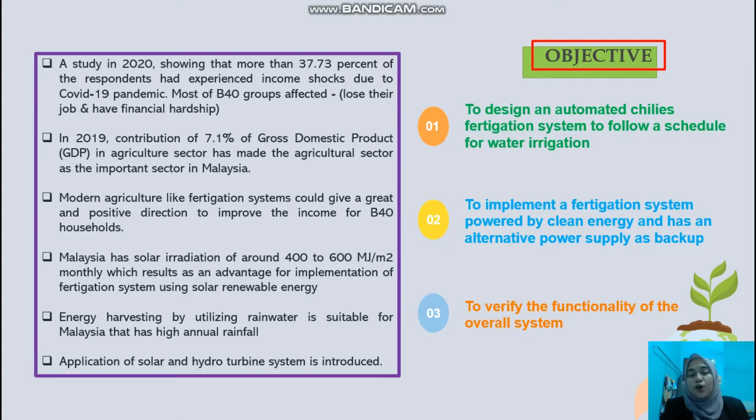So this is the flowchart of how the automated fertigation system runs. I will explain the hydro turbine part first. Basically, in this project we use two water tanks that collect rainwater and flow into the pipeline with high velocity to move the turbine. The turbine transforms the potential energy and flow into kinetic energy and converts it into electricity.

The solar panel collects energy from the sun and converts it into electric power. Both renewable energy sources, the hydro turbine and solar panel, are connected to the charge controller and then to the battery bank. The battery bank is connected to the inverter and timer, and this is the fertilizer timer.

The fertilizer timer is connected to the water tank, and then we move to the operation part. If the water pump is on, it will open and start watering the plants. If the switch does not open, it means no watering of plants that day.

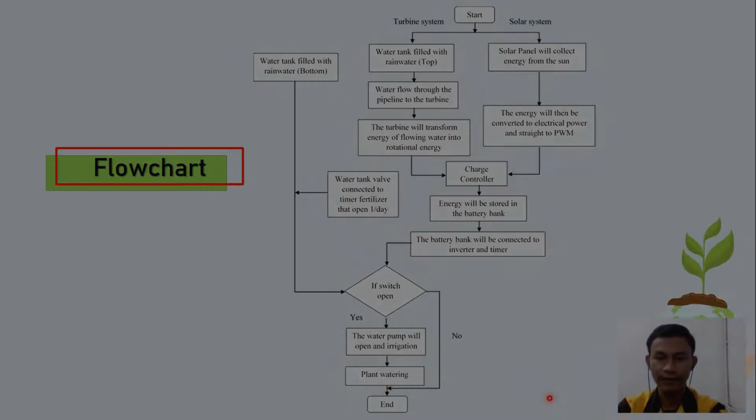Today I will be presenting the design of the automated fertigation system with hybrid solar and turbine power. As you can see here, there are two power sources generating power for the system, which are solar and hydro turbine. Starting from the hydro turbine, it generates electricity through the turbine controller to give an appropriate value to charge the battery.

Same goes for the solar panels. They generate electricity to charge the battery through the solar charge controller. We are using 12 VDC output power for the hydro turbine and 400 watts for solar. The battery capacity is 150 Ah with 12.8 volts to store the energy.

We are using the inverter that converts the electricity from DC to AC, following the AC load requirement. The size of the inverter is 400 watt. The function of the timer is to arrange a schedule in irrigating the plant. The timer will cut and turn on the power supply to the water pump, following the user setting. We are using 373 watt, which is half horsepower, for the water pump to irrigate the plant.

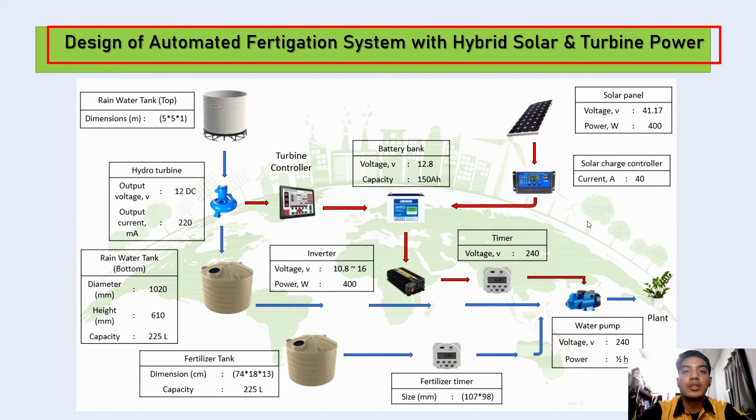There are 3 water tanks. The first one is a rain collector, and the second one is the rain water tank used to store the water from the water turbine for irrigating the plant. The fertilizer tank is used to store the mixed fertilizer in a liquid form. The fertilizer timer will schedule the irrigation to ensure that the plant will get sufficient nutrients.

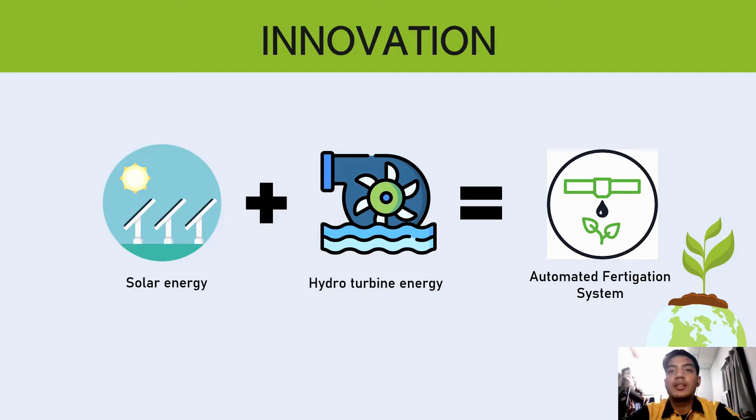For the innovation, we are selecting two renewable or clean energy sources, which are solar energy and hydro turbine energy, in giving electricity to the automated fertigation system. And I'm going to present the result of MATLAB simulation. So the first one is the relationship between the irradiance, temperature, and the output of solar panel.

Irradiance is manipulated from 1000 to below 400 over time, and the temperature is manipulated from around 25 degrees Celsius to 50 degrees Celsius and falls back to 20 degrees Celsius. So we can notice that the output current of solar panel remains constant, while the output voltage decreases when the irradiance decreases, and the voltage increases when the irradiance increases. The voltage drops when the temperature increases, and the voltage rises when the temperature drops to 20 degrees Celsius.

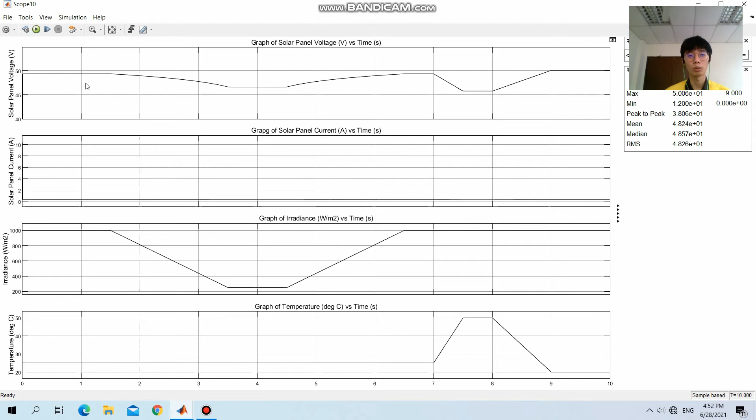We can conclude that the power of the solar panel is equal to voltage multiplied by current. So when voltage is increased, the power is increased. Power output of solar panel is directly proportional to the voltage of the solar panel. The second result shows the measurement of the battery. The battery is unloaded, with the load disconnected, and the battery will be charged by our solar panel and hydro turbine.

During the charging stage, the state of charge of the battery increases over time, and the voltage of the battery increases over time. The current of the battery increases in negative magnitude, which is below zero. This indicates that this is a charging state. The current flows into the battery, so the current is in negative magnitude.

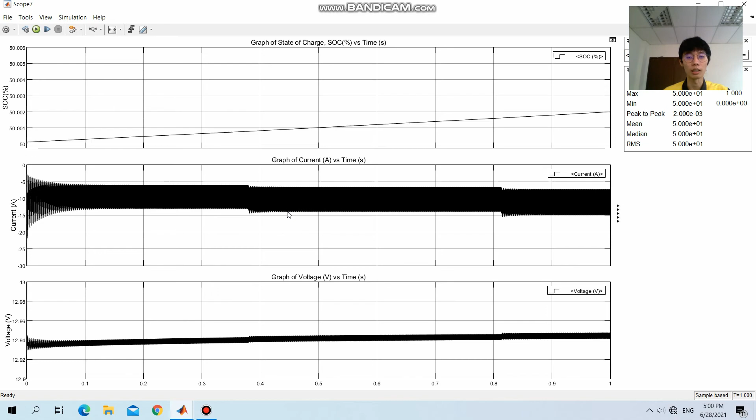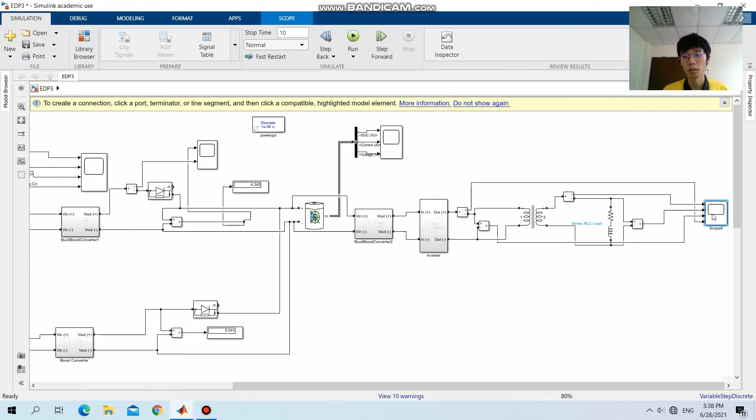As the conclusion from our project, solar and hydro turbine are able to generate power supply to the automated chili fertigation system, so that this will help to boost the B40 group's income, especially during this COVID-19 pandemic. Next, the battery bank is used as a backup supply in this system if the system is under maintenance or the energy supply from the renewable energy is not sufficient. Next, this project will improve the B40 group's technical skills and knowledge in the agriculture sector.

And lastly, the recommendation from this project is that understanding the implication of the hydro turbine result is very important due to the limitation of the hardware part that depends on the water availability.